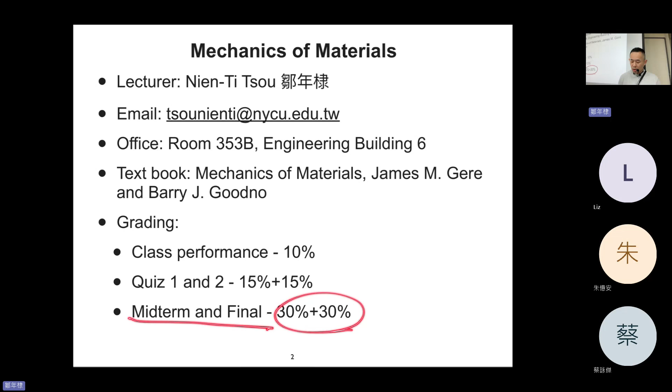So the grading is class performance 10%, quiz 1 and 2 total 30%, midterm and final total 60%, all right? And one thing I need to mention is that class performance 10% is not necessarily given to all students. It's not possible. Okay. So how can you get the 10%? We have many ways to obtain your bonus in class performance. The first one is correcting my mistakes when I write something down, which happens frequently. So if you correct my mistake, I will give you a bonus, and it will increase your class performance.

And I may also ask you questions during my lecture. So please raise your hand and answer the question. And even if you don't answer correctly, if you try your best to answer the question, you can still win your bonus in class performance. But if you never speak out, you never respond, you may only have the basic score of class performance. I haven't determined which score is the basic score. Maybe 6, 7, or 5 or 8. I don't know, depending on the overall performance in this classroom. All right. So don't assume that you will get 10% in class performance. All right. That's it.

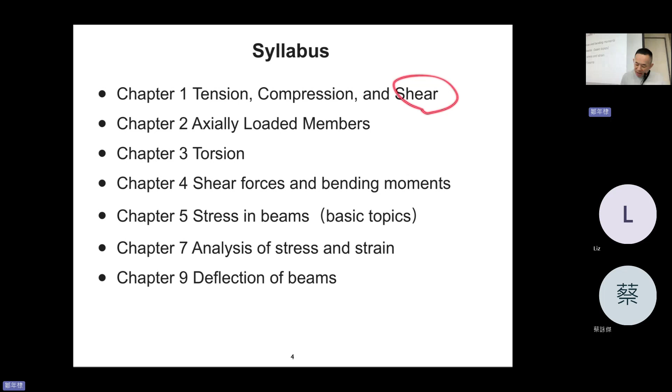So let's enter the syllabus. Chapter 1: tension, compression, and shear. Chapter 2: axially loaded members. These two chapters are combined together, because tension and compression are normal, axially loaded in the axial direction. But shear may relate more to torsion, so it's kind of axial loading and torsion.

Chapters 4 and 5 are together - chapter 4 is required knowledge for chapter 5. If you cannot understand chapter 4, chapter 5 will be completely messed up. So please, when you encounter chapter 4, understand it entirely and thoroughly. Otherwise your chapter 5 will be a mess, because every problem in chapter 5 relates to chapter 4. If you cannot solve chapter 4, you cannot solve anything in chapter 5.

Chapter 7, analysis of stress and strain, is really important for material science engineering students - this is the most important part. Chapter 9, I don't think we have time for, because we only have 16 weeks, so I won't talk about this.

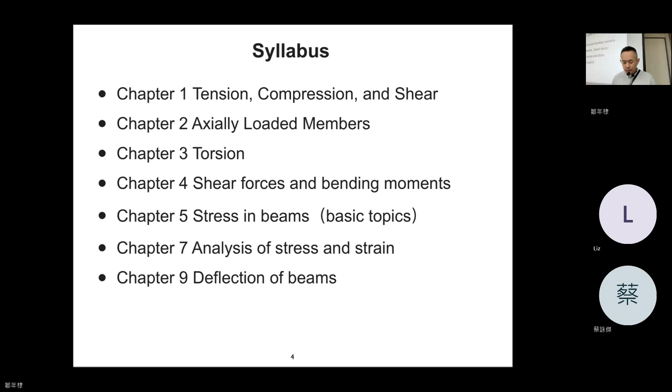So the mission of this course - why do we learn this? Because we need to know that materials can be deformed, break, or fracture. We want to see if a material is safe enough or can do its service usably and stably. Imagine you are sitting in a chair - you need to be safe, it needs to be stable. If it's wobbly, that's not good, right?

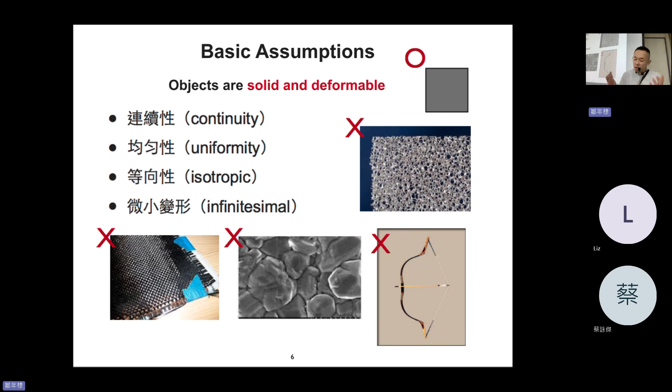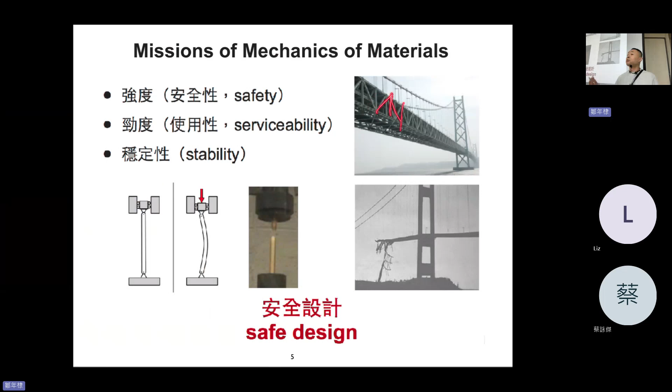A little advertisement—welcome! Next, the mechanics of materials course focuses on four components, four things you can see in daily life. The first one is link—link is something like a bridge; each component you can call a link. Easy. Shaft—what is shaft?

Shaft is like the wheel in your car—you have wheels, and the shaft is the thing connecting to the wheel. So shaft is a bar connecting wheels. You might think it's a line component, and link is also a line component—are they the same? They look the same. So why do we separate them into two items? Because link involves axial loading, remember chapter 2—axial loading means the link is actually compressed or in tension along the axial direction. But the shaft is different; although it looks the same, a line, the wheels at the two ends are rotating it. So although they look the same, the loading conditions are different.

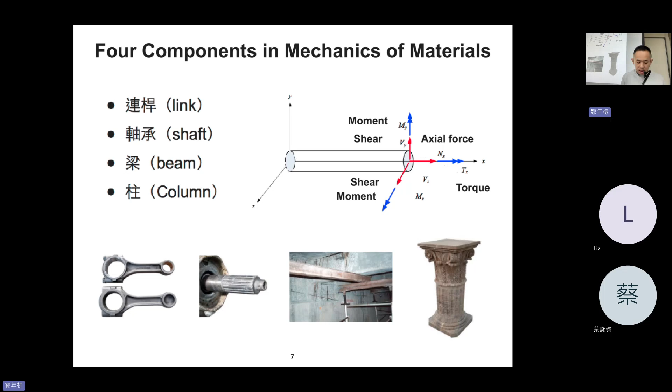That's what mechanics of materials teaches us, 4 components for human daily life. So now let's enter chapter 1: tension, compression, and shear. You may find the content in this chapter really similar to Introduction of Material Science Engineering, 材料科学导论.

I may go through this a bit faster or not, but again, the purpose of mechanics of materials is that we are going to do a safe design. So we are talking about stress, strain, displacement, 3 stuff.

This is a component, and when a lot of components combine together, you have the structure, or system. And when the system or component is under some loads, under some weight, under some torsion, shear, anything, it might fail. We don't want this to happen.

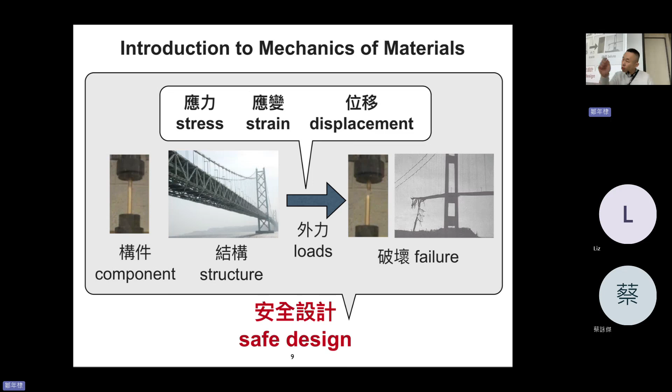So we need to determine and solve the material's limit. We need to say this material cannot bear, cannot suffer a load exceeding 50 kilograms, something like that. So we need to determine that.

Let's continue. But before we really get into that, we need to review a little bit about statics. I believe you learned that in senior high school, maybe we didn't call it statics, we called it physics. But I believe you heard the terms load balance, force balance, moment balance, right? So this is what we are doing here.

Just like we did in the previous few slides, I introduced the arrows. So I also want to give you the symbol definitions in this course. Please follow the rules, so we can share this as a common language in this course.

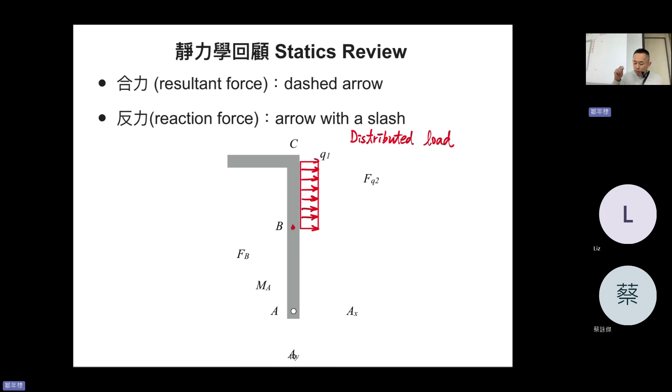So what is a distributed load? Distributed load means that this is a load that is not concentrated at one point. It's a load spread out through the length. Okay, so here Q1 is the magnitude, the height of the distributed load, and there will be a length of the distributed load.

So you can see that the distributed load Q1 here has a unit of Newton per meter. Which means that this is not load; this is the load per meter, per length. Okay? And you can see that they have the resultant force as a dashed arrow. And I will explain this next, after the 10 minutes.

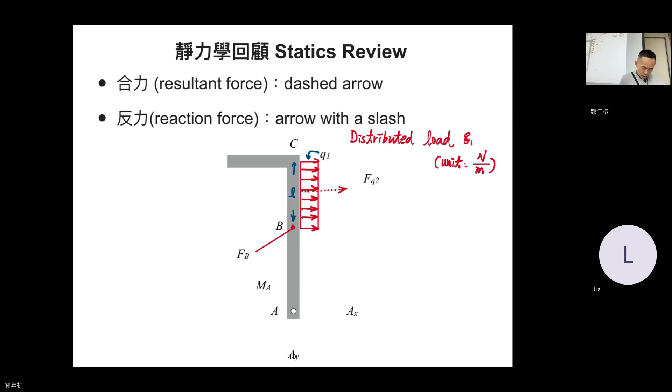And there is a force acting on point B, FB. The subscript is B, meaning it acts on point B. So F is called the force at point B. This force is what you learned in your senior high school. And you can say this is a concentrated load, 集中载重, because it is concentrated at a point, right? So FB is force B.

And then we talk about the resultant force. What does that mean? A resultant force is when a lot of forces or a distributed load are summed together to be one resultant force. It's a kind of simplification; you make it simpler. Okay, so a distributed load is a load divided by length. So Q1 is not the force. It's the force divided by meter, divided by length. So it needs to be multiplied by length to become a force, in Newtons.

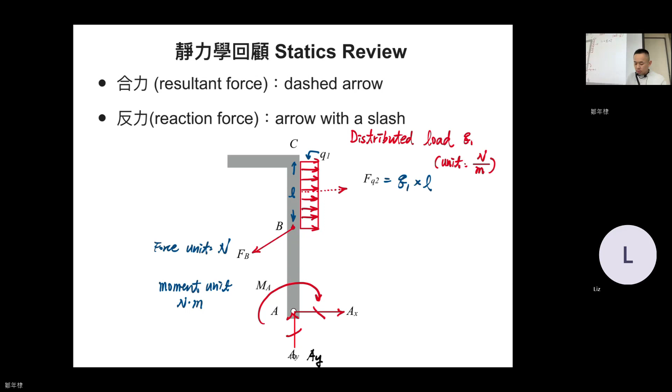Now, normal stress. Maybe you wonder why in my first lecture I spent the entire 2 hours teaching. It's because we only have 16 weeks. If we had 18 weeks or more than 20 weeks, I would take an even slower pace, and maybe just give the introduction and let you go on the first day. But because we only have 16 weeks, I'm sorry, I need to make every hour count.

Now, normal stress, a really important definition. Normal means vertical, all right? Vertical stress. Stress in Chinese is 应力. Normal, 垂直应力. Why is it called normal stress? Normal stress acts on a plane, on an area. It's a really simple definition. If you have a long prismatic bar subjected to a load P, and then I'm going to give you a prismatic bar.

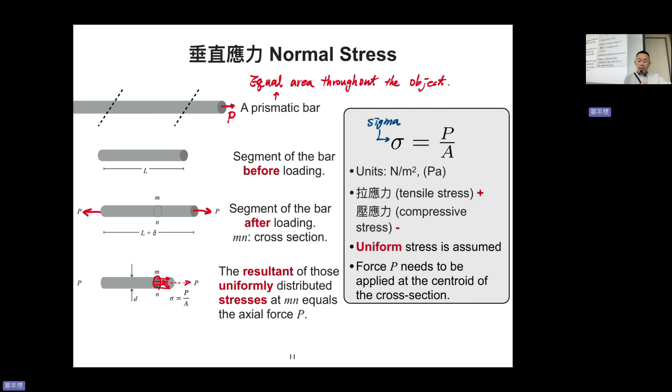Why? Because I'm going to give you a simulation result. This is a finite element simulation result. What is finite element? You can imagine that in mechanics of materials we calculate something like a square or a cube, and the force, and then we determine the stress by our hand. It's easy. You can determine it by your hand.

But if you have a really complicated material or system, how can you calculate by hand? Computer can help us. So we cut all this material into many small elements. So you can see that there are many shapes, a mesh, a network on this material. So the computer can calculate every single element, what is the stress on it, and then sum it up together and show you. So this is the power of simulation or computational mechanics.

So the prismatic bar here. If you have a concentrated force and we calculate that, we found that, by the way, the blue part is the lowest stress, yellow is greater, and red is the greatest value of stress. So you can see that in that bar, the stress values are not constant in all the material. Actually, the stress is localized. What does localized mean? It means that every place has a different stress value.

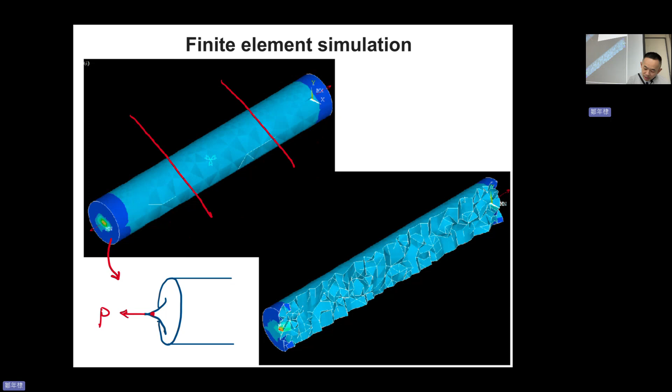So when we are going to define P divided by A, you better choose a simpler section. And how does the force flow in the bar? It's just like water. The water kind of flows through the bar. So that's the reason why the middle sections are uniformly light blue. And the dark blue means no force at all.

So actually, this dark blue place is stress free, which means that sigma x equal to 0. Actually, this is kind of supplement material, 补充教材. I just want you to know what the real world looks like.

So when you have a point load P acting on the surface, you can see that this is the highest point of the stress. But because of the flow of the force, there's nothing here. So this place feels nothing, because the force is not acting on it. But because of the flow of the force, you can see that this force is kind of uniform. So it can make sigma equal to P divided by A.

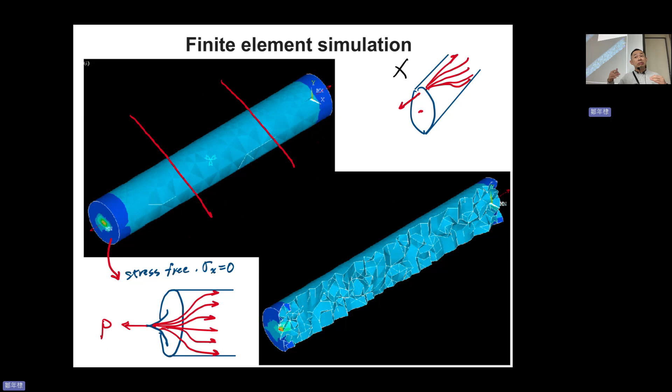So definition of the normal stress has been done. And then next, we're going to introduce normal strain. Normal strain, again, a prismatic bar, and we need to give the segment, and the segment has, before the load, length L; after the force P is applied, it becomes L plus delta. The delta is displacement. Epsilon is called strain, and this is called delta. Divided by L. So the displacement divided by the original length equals epsilon.

So you can imagine that this is kind of a ratio of the deformation. Maybe you can say percentage. 就有点像是延长率、伸长率，或者是缩短率。 So which means there's no unit, because it's a rate, it's a ratio. No unit. This is so important. So you can say percent. For example, the strain is 0.02, and you can also say 2% strain. But keep in mind, 1% strain is really big. 2% is even bigger.

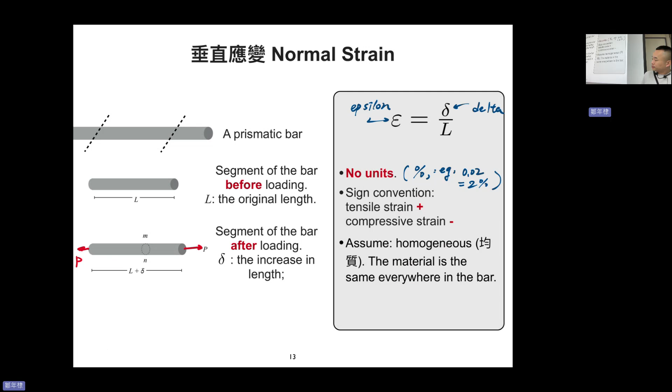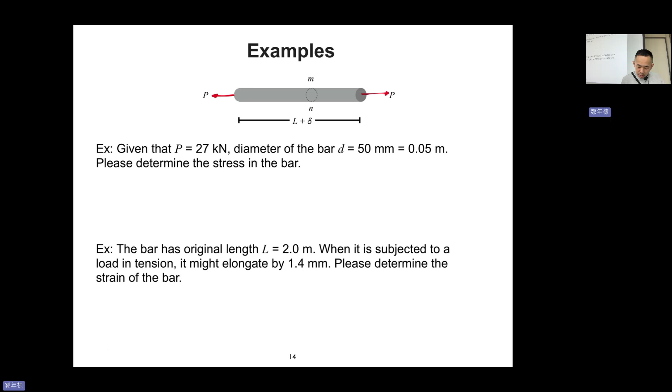So the next example is really simple. We have a bar with load P, and we typically use the MKS unit system: meter, kilogram, second. Given that P equals 27 kilonewton. K means 1,000. Diameter of the bar d equals 50 millimeter, equal to 0.05 meter. So typically we will transfer 50 millimeter to 0.05 meter. Please determine the stress.

Easy. Sigma equals P divided by A. So P divided by pi d squared divided by 4. Of course, this is a circular area. So 27 times 1,000 Newton divided by pi times 0.05 squared divided by 4 equals 13.8 times 10 to 6 Pa, equal to 13.8 MPa. Wow, that's big. So your stress is typically MPa, 10 to 6. If you calculate your stress is 13.8 times 10 to 2 Pa, maybe something is wrong with your unit.

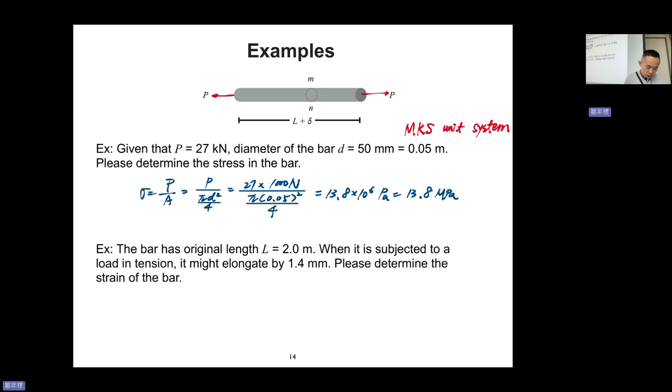Next, the bar has original length L equal to 2.0 m. When it's subjected to a load in tension, it elongates by 1.4 mm. Determine the strain. Very easy. Delta divided by L, 1.4 millimeter divided by 2.0 meter, is 0.0007, equal to 0.07%. So your strain looks like this. Easy, right? Well, later it might be really difficult. Enjoy this moment. Simple.

You know, when I talk in English and in Mandarin, from my personal experience, I feel I'm a different person. When I speak English, I become more of a gentleman, more polite. If I speak Mandarin, the ugly part of my heart will show. Because I learned my English in England, 007, British gentlemen, and those gentlemen taught me how to speak English like them. So my brain automatically became like them, more polite. But if I speak Mandarin, I feel safe, comfortable, and the ugly part will show.

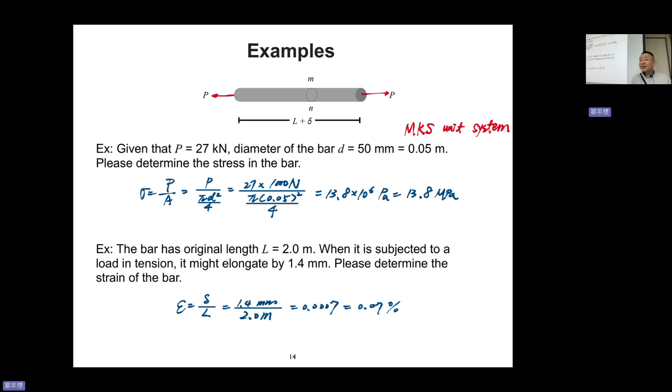So maybe next time with your partner, girlfriend or boyfriend, you can suggest: how about let's argue in English? And then maybe you will be happy forever because you're all polite and you cannot communicate well, and then forget it. So maybe you can try that.

All right. So next, you have a tube. Which means it has two diameters, one bigger, one smaller. It's a tube, 管子. And it has a blue cap on it, and the pressure load is on the middle center of the blue material. But interestingly, we are not calculating the blue material. We're calculating the stress for the gray material. The blue is just the cap that pushes evenly.

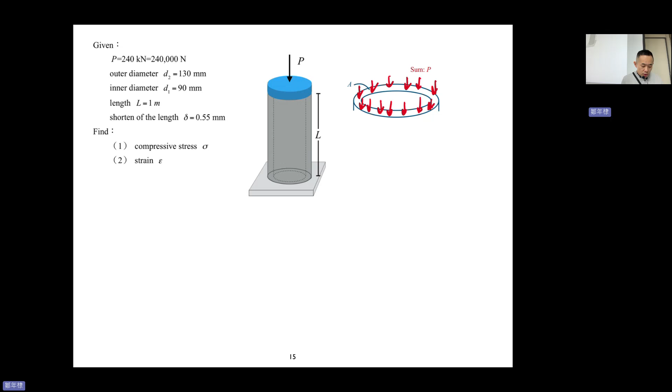Thanks to that cap, we have a uniform force on the cross-section area of the tube. So the sum is P. P is 240 kN, outer diameter d2 is 130, d1 is 90, length is 1, and the shortening delta is minus 0.55 because it's shorter. Find compressive stress. Good, let's go.

A equals pi over 4 times D2 squared minus D1 squared, equal to pi over 4 times 130 squared minus 90 squared, which is 6912 millimeter square, or you can change it to 6912 times 10 to the minus 6 meter square. All right, so this A, we've done that.

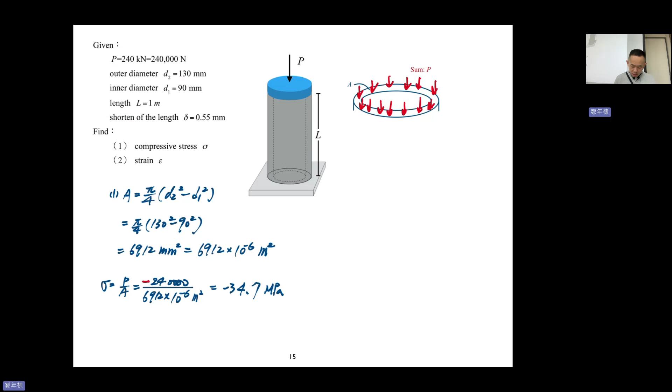The second one is strain epsilon. Epsilon equals delta divided by L, 0.55 divided by 1000, minus. So, which means minus 5.5 times 10 to the minus 4. Okay, done. Easy.

The next one is more difficult and also has a nice concept. The next problem has a good concept for you. I hope I can finish it in time within 7 minutes. I actually introduced this concept in the previous few pages, but maybe not that thoroughly or systematically. I can tell you in the next example, right? Okay. The next one is quite important. Go.

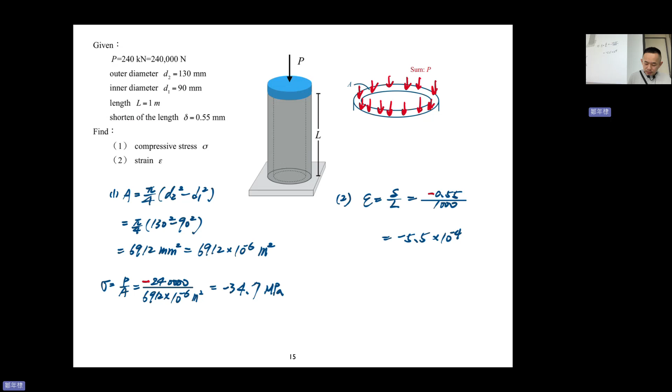This is a bar holding a weight. The weight is W. The steel rod is circular, length L, diameter D, bucket weight W. So find sigma max. Sigma max, which means that the sigma is changing throughout the bar. Not sigma equals P divided by A, where everywhere has the same value. So please remember that sigma, or stress, is not constant throughout the material.

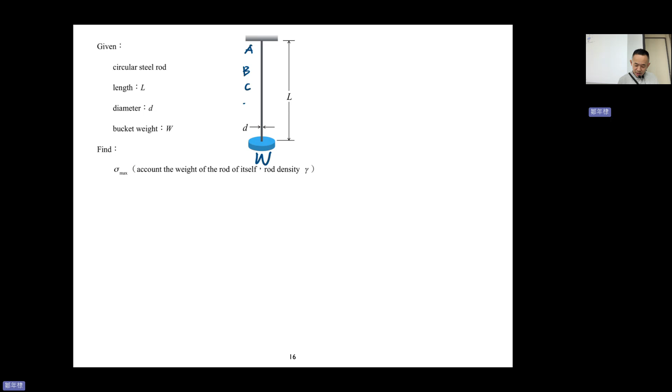Account for the weight of the rod itself, rod density gamma. So, can you tell me where sigma max occurs? At this point, or that point, or that point? Which one has the maximum sigma? Give me an answer, and I will give you a bonus. I'll give you A, B, C, D, E. 5 points. Which place? Give me your answer and reason. Which one? Sorry? A. Why?

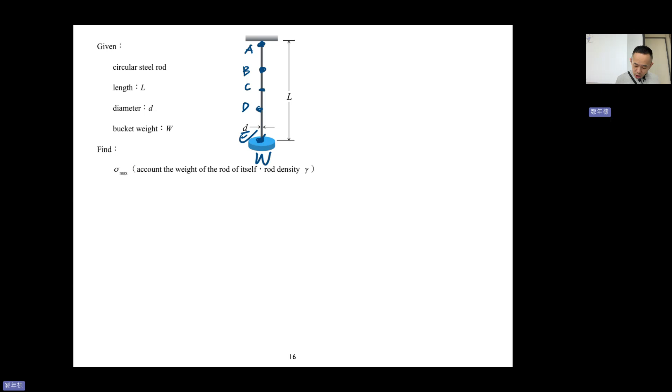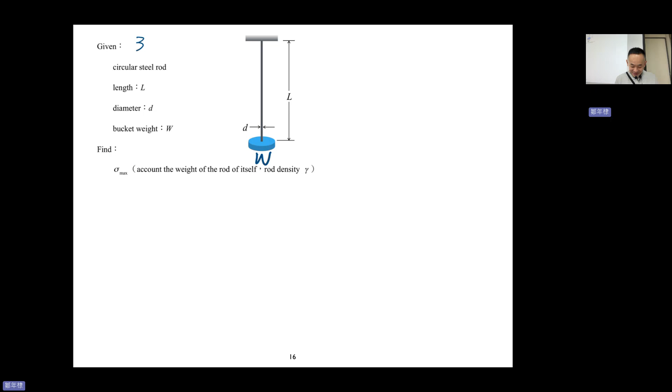Exactly. Very nice. Good, good. So what's your number? 39. By the way, this is a really fun part. When you read your ID number in English, this is difficult. Can you? Difficult. 1116. Oh, you are good. 3039. Is that correct? Very good. Prepare reading your number. Okay, this is fun. Anyway, I will talk about how I prepared English telephone speech, I mean communication when I was in the UK or US.

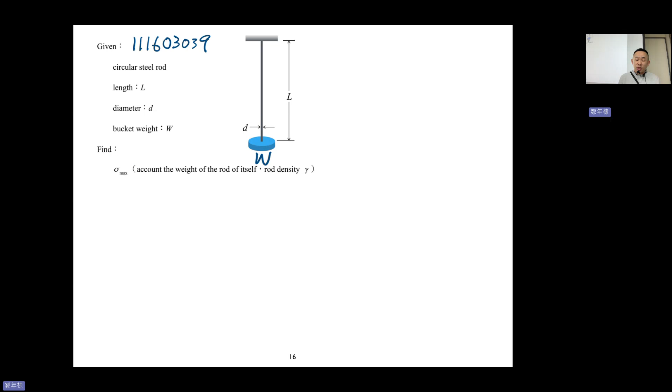Anyway, I don't think I have time to finish the problem, but I will give you the concept. So you see, this is where sigma max occurs, right? Because it needs to bear the bar weight itself and also the bucket weight. But at this point, it doesn't need to bear the bar weight. It only needs to take the W weight. So you can imagine that the stress is decreasing. It is not a triangle, it's a kind of trapezoid shape, right?

Okay, then I'm going to give you the most important concept here. How can we determine sigma max? We need to cut it. This is really, really important. If we want to see the stress or force anywhere in the bar, we just need to cut it. I want to see this point, I just cut it at this place, and then separate it. Sorry, I enlarged the bar. I cut it. All right.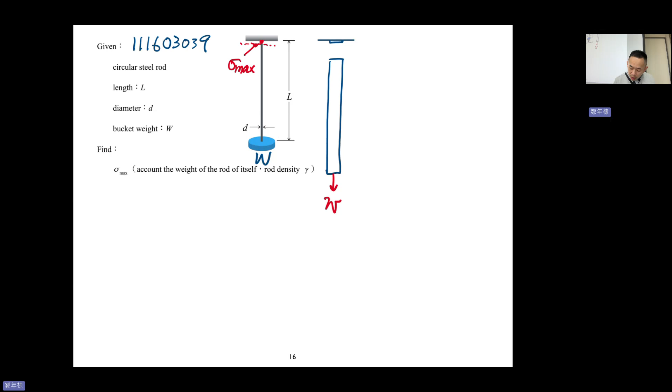Now, you have a force W here, and you have self-weight here, right? You cut it, but as I mentioned, do you think this part will fly away? With all this force, it would fly down, right? No, which means there must be a force in this area to prevent it from flying down. So this is sigma max. This is the most important concept for today. If you don't understand what I'm talking about, please come here. I will finish this course today. Thank you.